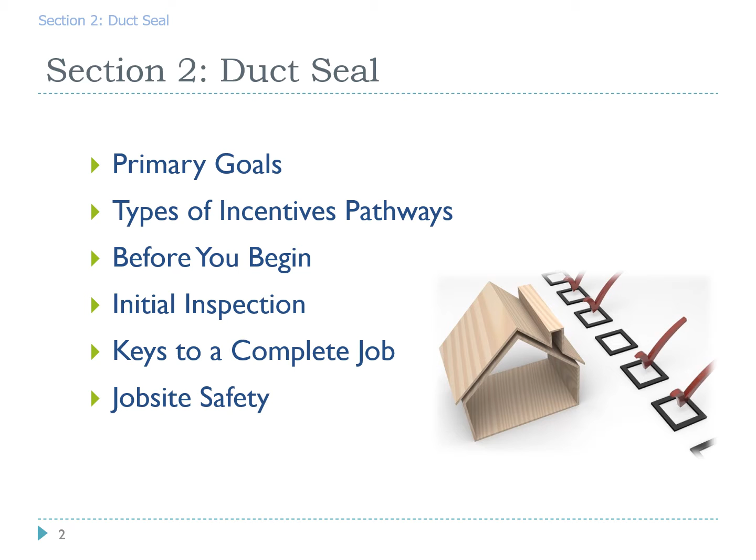The agenda for this section covers primary goals, types of incentive pathways, what to know before you begin, initial inspection, keys to a complete job, and job site safety.

If we have ducts completely inside the conditioned space, most of the air does get into the home. With duct sealing, if we can make an improvement close to 20%, that's better than an increase from an 80% furnace up to a condensing gas furnace, or for most cases with a heat pump, any improvement in HSPF.

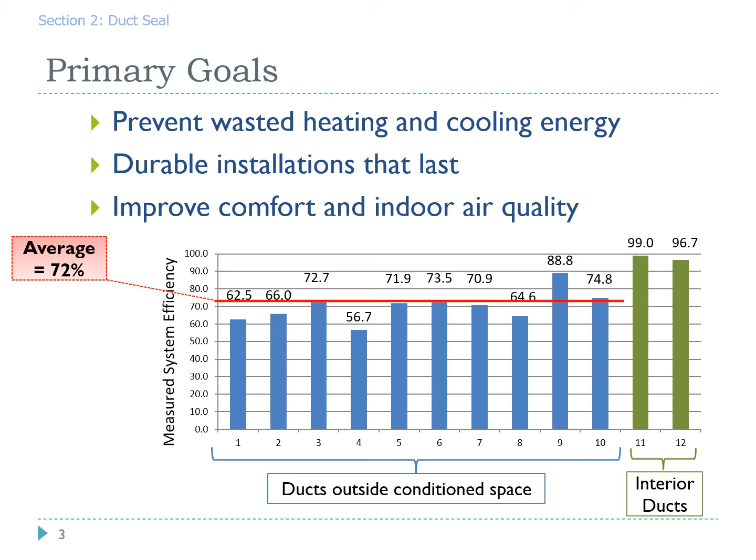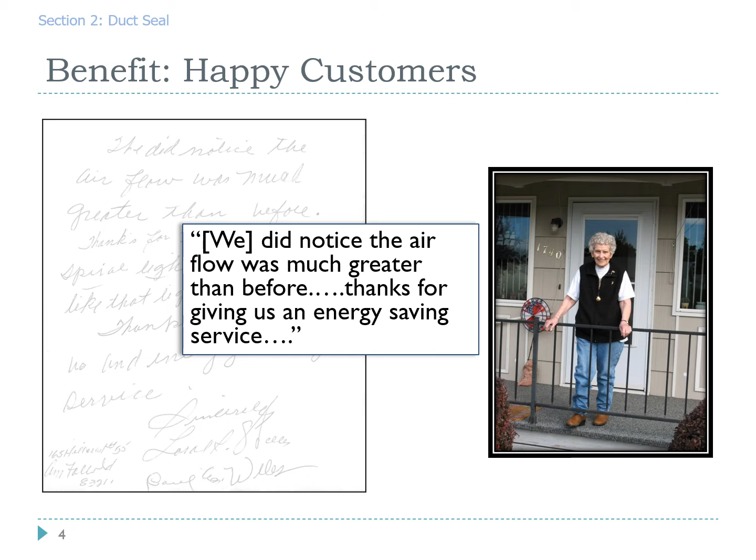One of the major benefits is happy customers. In this example, the homeowner wrote to the utility and the contractor to let them know what a fantastic job they did, and that she noticed greater airflow out of her registers and energy savings on her utility bill. We all strive for happy customers.

There are two types of duct sealing incentive pathways: PTCS duct sealing, which requires pre and post duct leakage testing, and prescriptive duct sealing, which does not require duct leakage testing. Check which pathway your utility offers—some may offer only one of these two, and some may offer both.

For prescriptive, other than not requiring the pre and post duct leakage testing, all the other specifications remain the same. You'll need to check with your technician's certification type to ensure they can meet either the PTCS duct sealing or prescriptive duct sealing requirements.

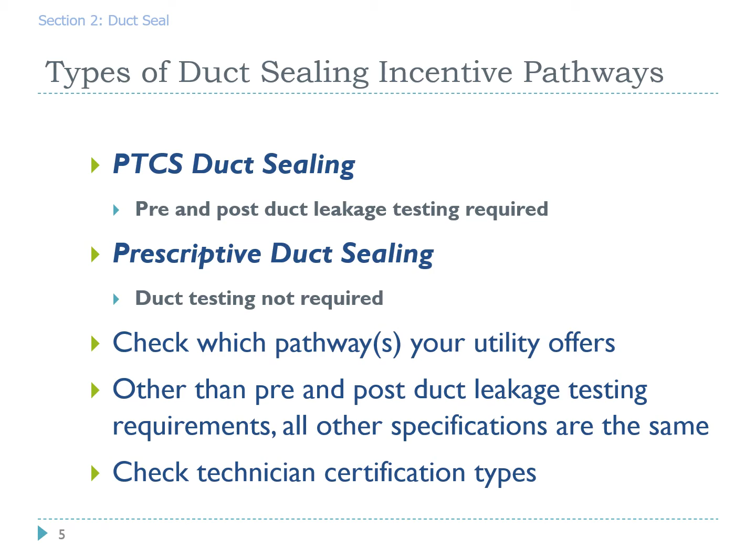So what's involved for PTCS duct sealing? Measuring the duct leakage with fans. We do a leakage to exterior test, which technicians have been trained for in the class. Then we seal all the opportunities, and then measure the leakage again to find out the difference. Remember, prescriptive duct sealing does not have this leakage measurement requirement.

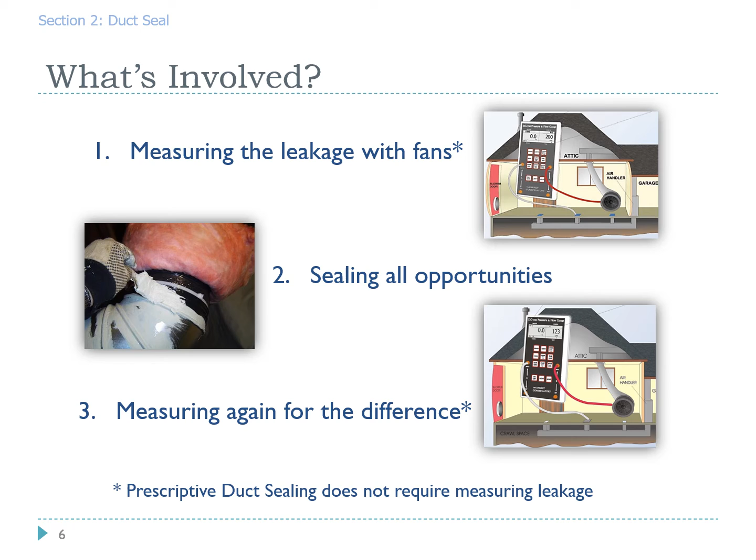Another specification is that at least 30% of the ducts must be located in an unconditioned space and be accessible. Note that ducts in basements are considered to be in the conditioned space.

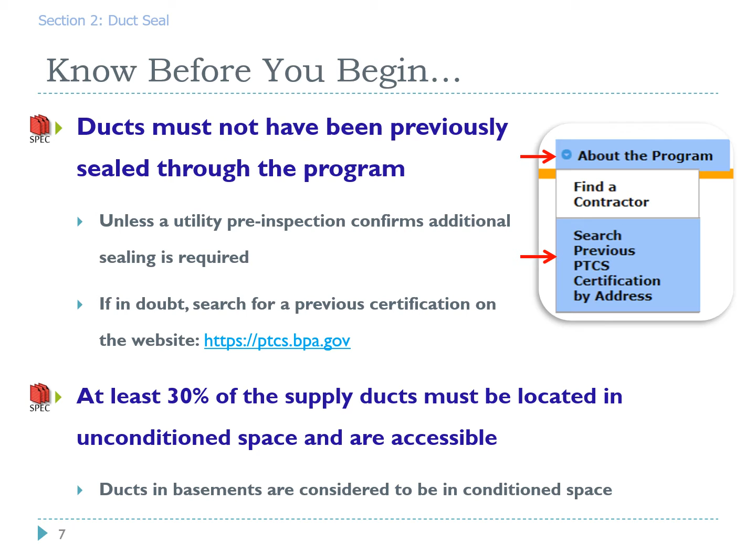Outside versus inside: this graphic represents a home, and you can see that the attic is definitely outside the conditioned space, as is the crawl space, and even a garage where the air handler is located in this graphic would be outside. Inside the home, obviously, is inside conditioned space.

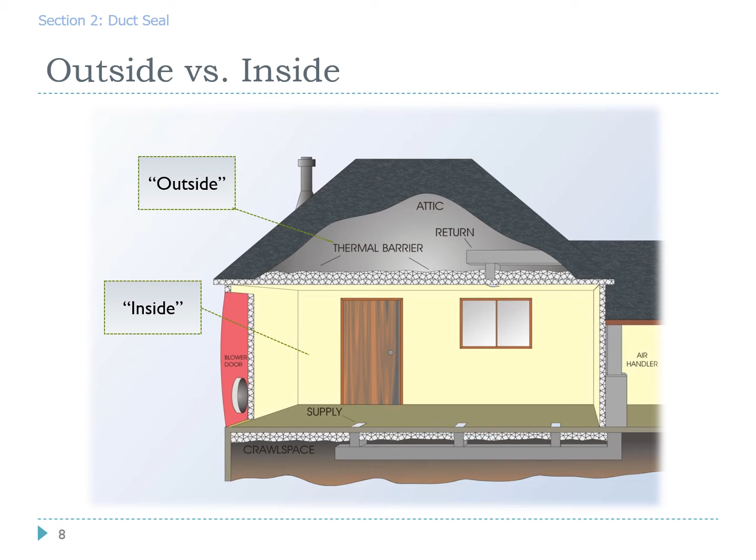The leakage requirements for single-family homes fall into two categories. Pre-sealing leakage is based on the home's square footage. If the home is larger than 1,667 square feet, we have to have a leakage before starting any work of at least 250 CFM. If the home is less than 1,667 square feet, we have to have a leakage equal to or greater than 15% of the home square footage.

For example, a 1,000 square foot home falls into the category of less than 1,667 square feet, and the leakage would have to be 15% of that square footage. So for a 1,000 square foot home, we'd have to have a leakage of at least 150 or more in order to be able to start doing work.

For post-sealing leakage, we have to meet one of two requirements: the CFM leakage after sealing has to be a 50% reduction, or the CFM has to be equal to or less than 10% of the square footage of the home.

Using that same example of the 1,000 square foot home, if we tested in at 150 CFM of leakage, we would need to get that down to at least 75 CFM to achieve the 50% reduction, or down to 100 or below to meet the 10% of the square footage of the home. And remember, prescriptive duct sealing does not have these pre and post leakage requirements.

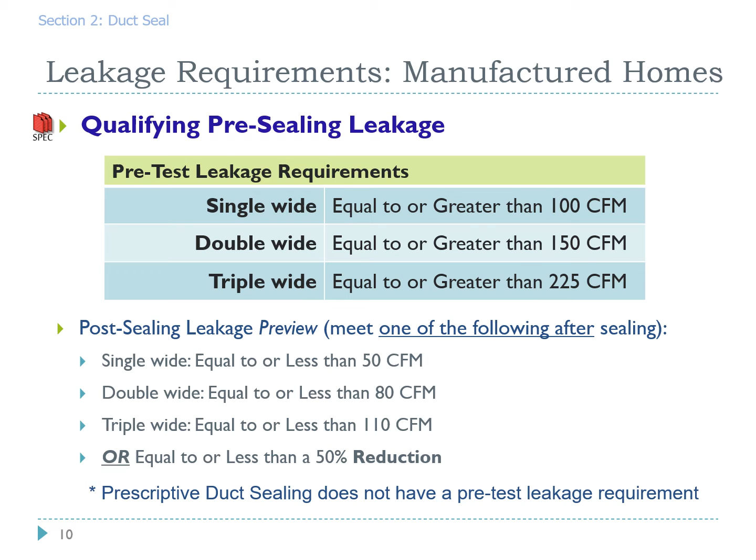For the initial inspection, you want to find the major problems. You want to check for building cavity returns - they're pretty prevalent in older homes. Decide whether duct sealing is enough, and then also decide whether parts or all of the duct system needs replaced.

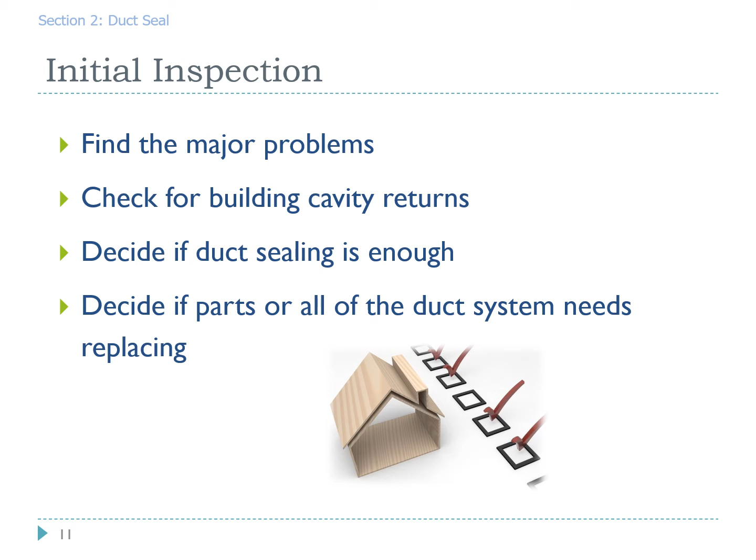Occupants of the home have a lot of information about the homes they live in. Here are some sample questions that might help you. Do you have rooms that are hot or cold? It may help find duct disconnects or proof of poor duct design.

Do you pay high energy bills? It gives them an opportunity to express that frustration if they do pay high bills. And if you're familiar with typical energy use in your area, looking at those bills can give you a wealth of information.

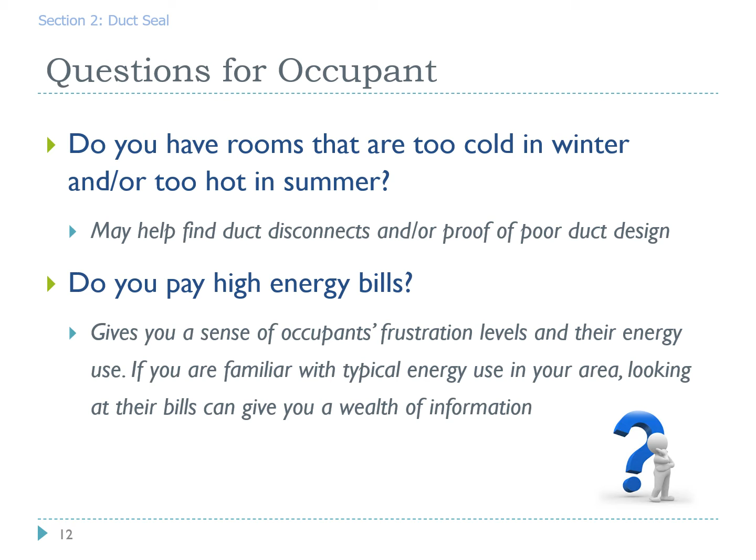Continuing with questions for the occupant: Do you notice any unusual smells when the furnace air handler turns on? Garage odors, crawl space odors - this can give you some solid clues of disconnected ducts.

Do you notice any insulation on your furnace filter when you change it? Insulation on the furnace filter is another good indicator of serious duct problems in the attic. I had some insulation in my register recently, and when I investigated, I found that a mouse had chewed through the supply flexible duct, and the insulation ended up in my register.

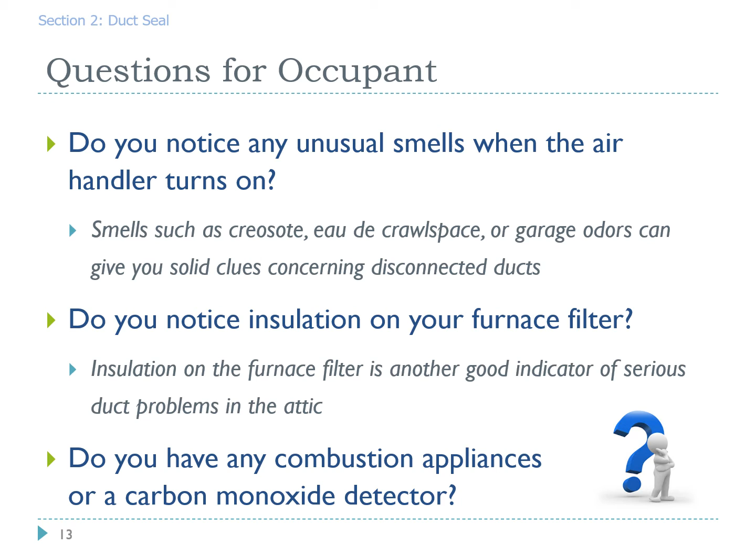Do you have any combustion appliances or a carbon monoxide detector? We'll cover why you'd want to ask that here in a little bit.

Conducting a visual inspection: look for the real obvious tests inside a home, like does air come out of the register? If not, a damper might be shut, or it might be due to a disconnect. When you remove a register or grill, do you see ductwork, or do you see the attic or a crawl space? These are great ways to identify where the areas that need to be addressed are.

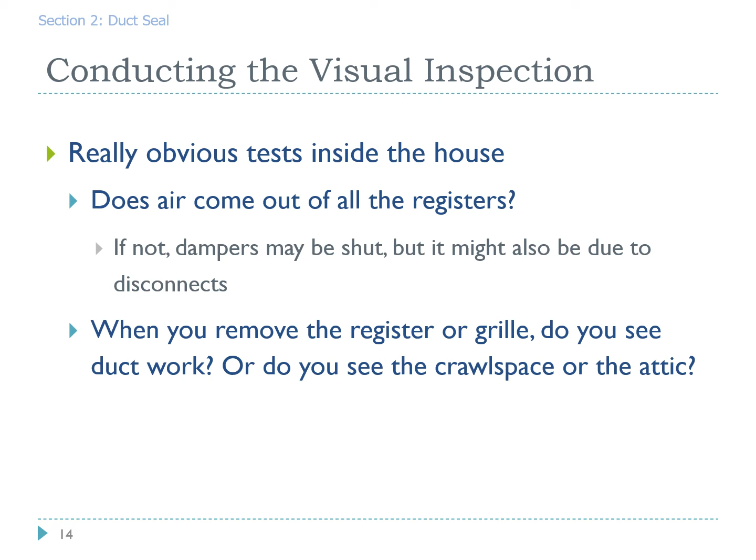Here are some images from a visual inspection. Upper left, we have a never-connect - duct was there, boot's there, but no hole through the floor to deliver that air into the home. In the middle on top, it looks like some type of dryer vent style ducting.

There's some tape, and it looks like a lot of leaks there. Upper right, we have a takeoff that was tabbed into a plenum or some type of supply duct, and it looks pretty severely leaking.

Also on the bottom left, we have gores of an elbow - those leak pretty bad. Bottom right, we have a flexible duct that has been pulled off, disconnected. These are great ways to identify areas that need addressing in duct sealing.

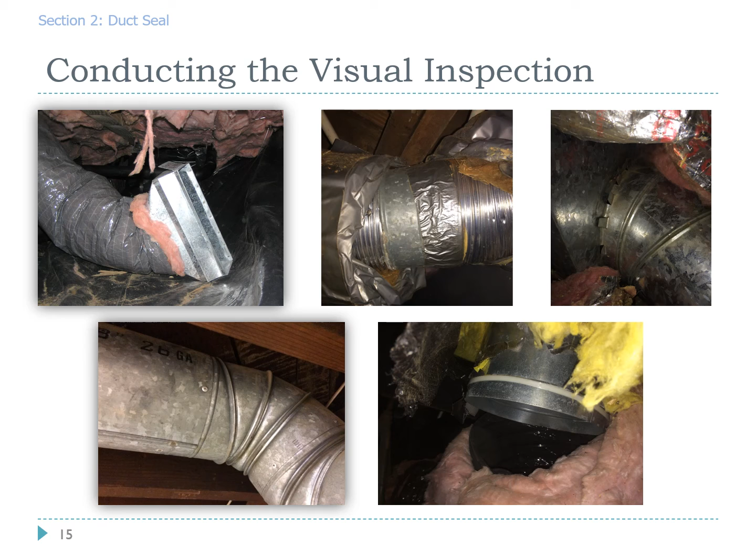Also, insulation is not a barrier to accessibility. This includes attic insulation. So with attic insulation, you need to move the insulation out of the way, seal the ducts, then put the attic insulation back to as good as when you moved it out of the way. Also, when insulation is removed from ducts, it shall be reinstalled and securely attached with mechanical fasteners.

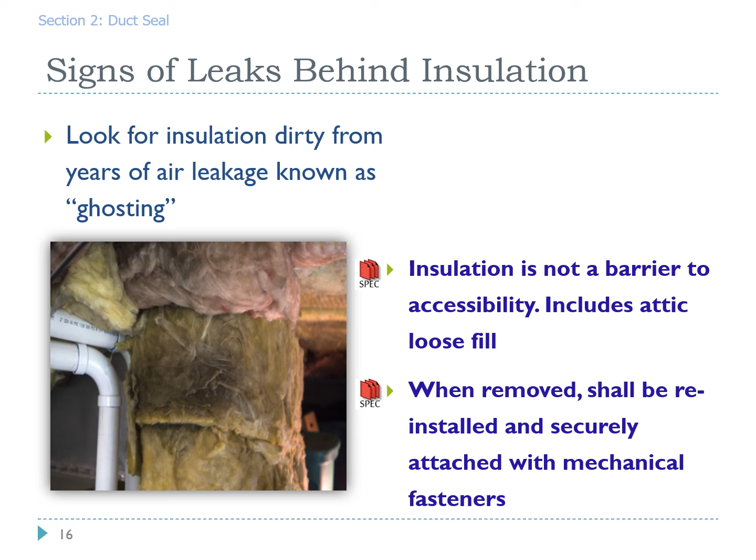Duct sealing really leaky duct systems can be quite problematic. If you have a catastrophically leaky return, like pan floor joists or cavity returns, there's a specification that allows for a supply side only test to be used to determine that duct leakage.

Trying to seal up a cavity return or a pan floor joist might not result in much CFM reduction. So we have this stipulation where, if this is the case, you can separate the supply off, typically at the filter location at the furnace, and test only the supply side to get your leakage numbers. Make sure you indicate that on your documentation.

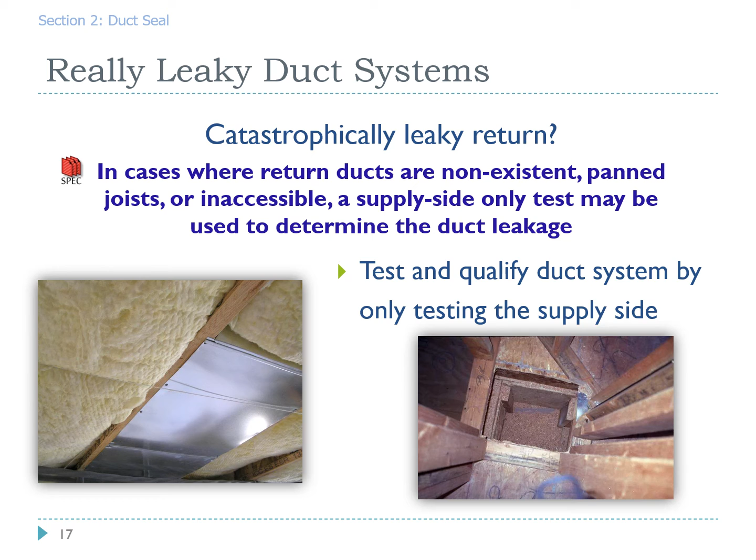What problems are you trying to fix? Comfort issues usually require re-engineering, so don't overpromise results. If a room needs 300 CFM, the ducts need to be large enough, and duct sealing might not be enough to take care of that issue.

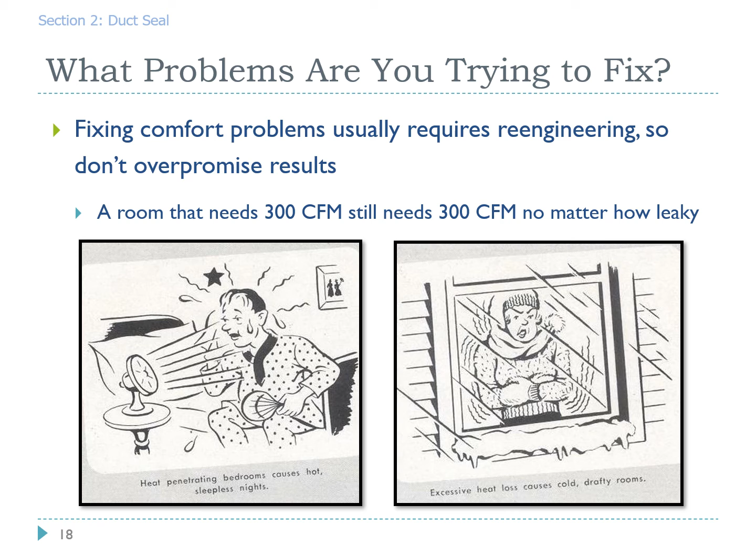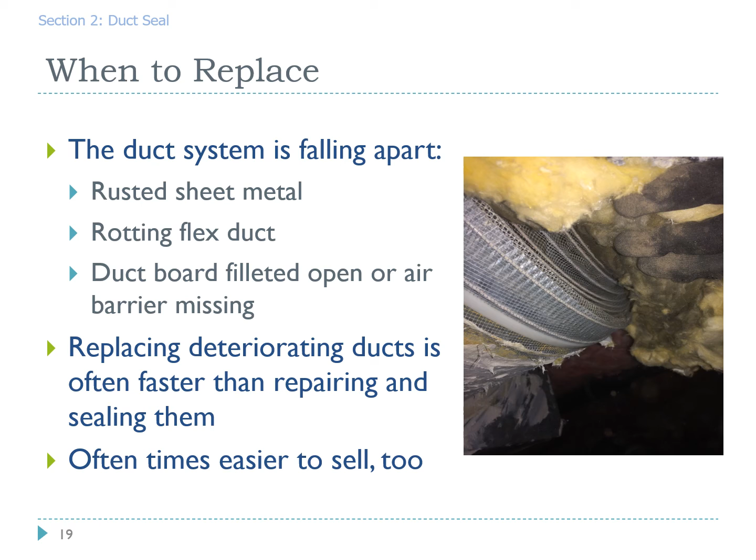When to replace duct components: if the duct system's falling apart - you have rusted sheet metal, rotting flex duct, or duct board that's missing some of the air barrier - it's often easier to replace those duct components than trying to repair and seal them. And oftentimes it's easier to sell too.

Keys to a complete duct seal job: remove the old tape, mechanically fasten, and make sure necessary repairs are made. Put tension ties on the inner liners and outer liners of flex duct.

Put screws in the metal duct connections. Support the ducts and fasten boots to the subfloor. Seal the ducts with UL 181 listed mastic. Plug, don't paint. The specification says mastic should be as thick as a nickel.

That's from the manufacturers. In order to be able to seal properly, the mastic should be that thick. Tape is only allowed on the air handler to plenum connection or an access panel.

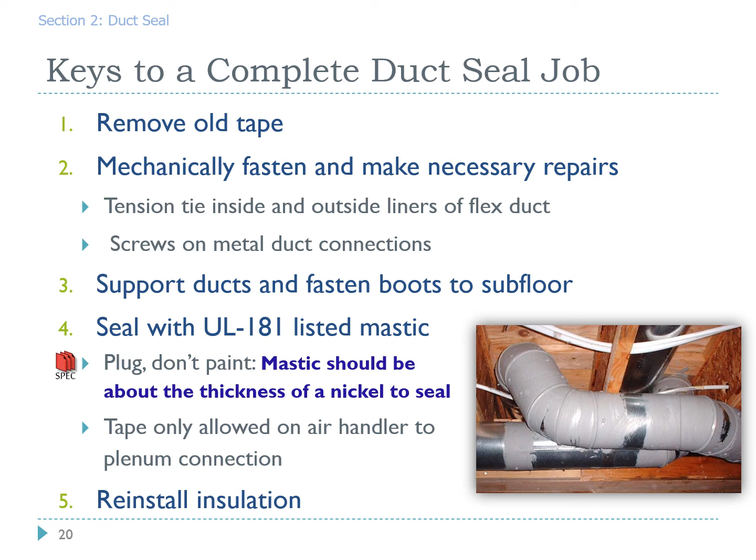And with insulation, once the ducts are sealed, it needs to be reinstalled. Fasten, support, and seal them. The specification says all accessible portions shall be repaired, mechanically fastened, supported, exposed from the insulation, sealed with the approved materials, and then re-insulated.

Below we have some areas that definitely need addressed: air handler to plenum connections, joints between the metal ducts, supply and return plenum joints, seams, caps, and corners, gores on the elbows, inner and outer tension ties on flexible duct connections, takeoffs, seams on boots, Ys, Ts, and splices, and for manufactured homes, the crossover, and also end caps.

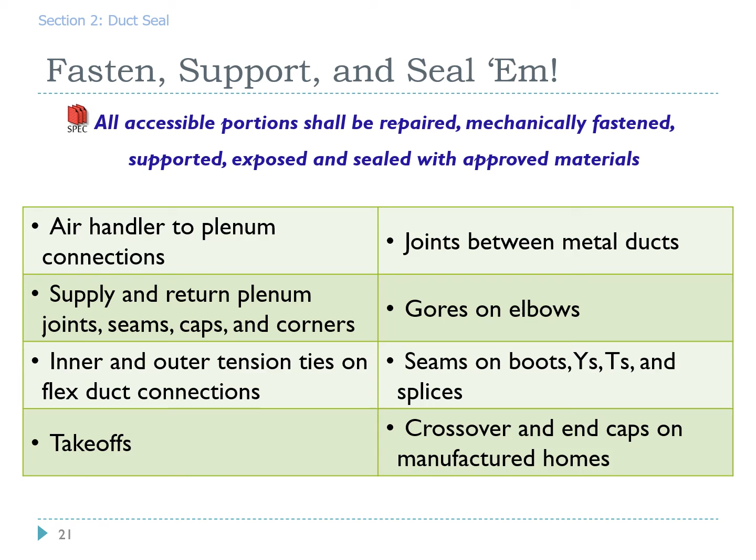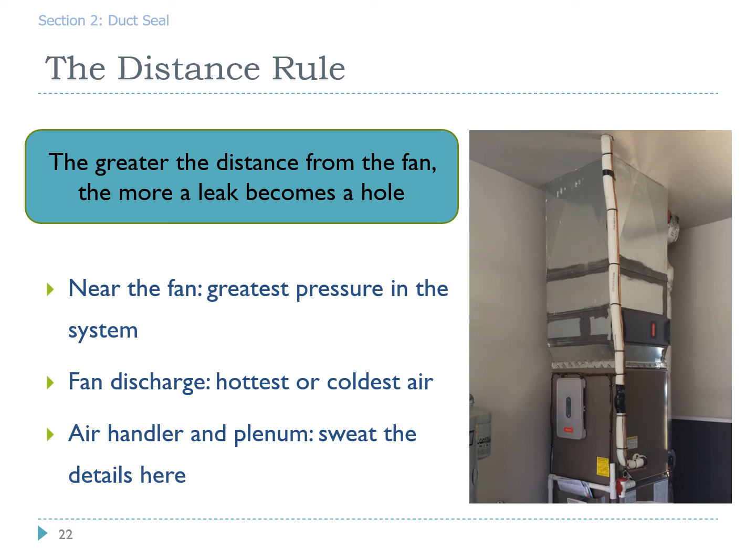The distance rule: the greater the distance from the fan, the more a leak becomes a hole. At the furnace is where the greatest pressures in the system are, also the hottest and coldest air. Right at the furnace, the air handler is where we really need to sweat the details to make sure air stays inside that duct system and gets delivered into the home.

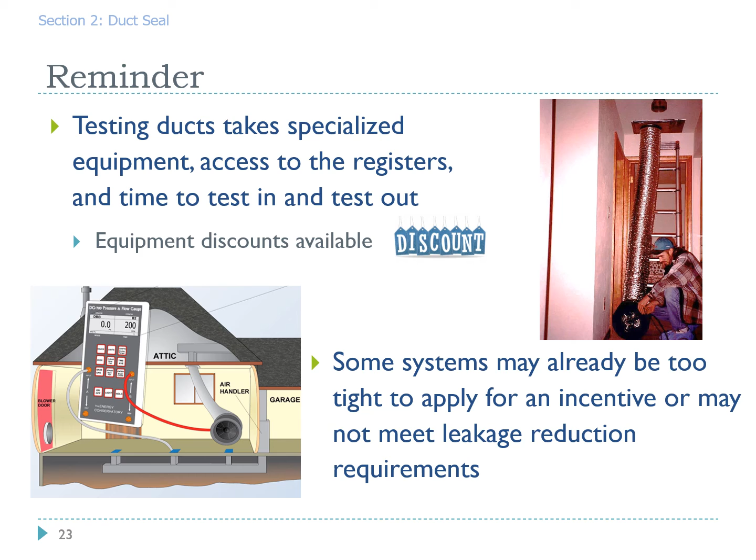A reminder, testing ducts takes specialized equipment, access to registers, and time to test in and test out. There are equipment discounts available, and that'll be discussed in the next section. Also a reminder, some systems might already be too tight to apply for an incentive, so those pre-leakage requirements are important to remember. Trying to get a duct system tight might be an issue, and the incentives might not be available. It might be important for comfort, but no incentive will be available because there's just not enough energy savings available for the utilities to pay an incentive on that.

If anybody's using the AeroSeal equipment, AeroSeal is approved for use with PTCS with a few exceptions. You have to add a note into the registry entry. Both supply and return sides of the system must be sealed.

All the other specifications are still required, including duct repair, tape removal, supporting the duct systems, mechanically fastening them, and testing. You still have to do a test in and a test out leakage to the outside. Still required use of the blower door.

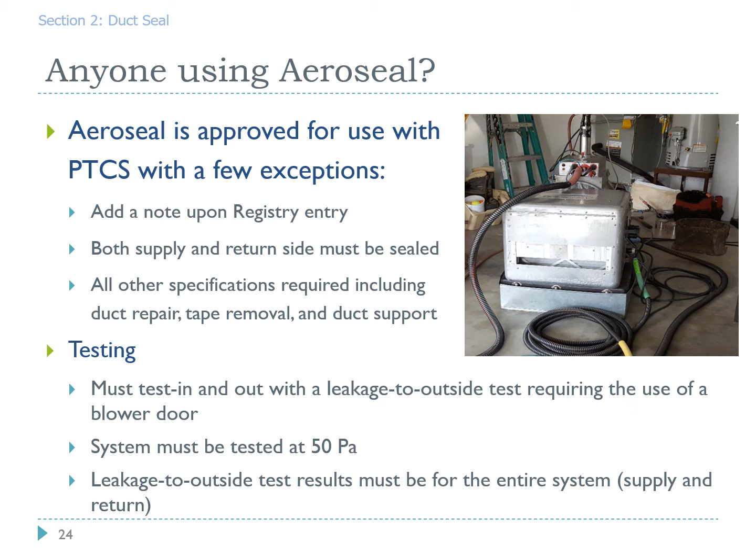The system must be tested at 50 pascals. I know the equipment is typically set up to test at 25. Leakage to outside test results must be for the entire system, supply side and the return side.

Combustion equipment: whenever we have combustion equipment, we need a CO alarm. It's required. If there's anything that burns any fuel in a home or attached structure, like a garage, the program requires that a carbon monoxide alarm be installed. No matter what fuel it uses, gas, propane, fuel oil, wood, pellets, etc., just something that burns, we need to have that carbon monoxide alarm in the home.

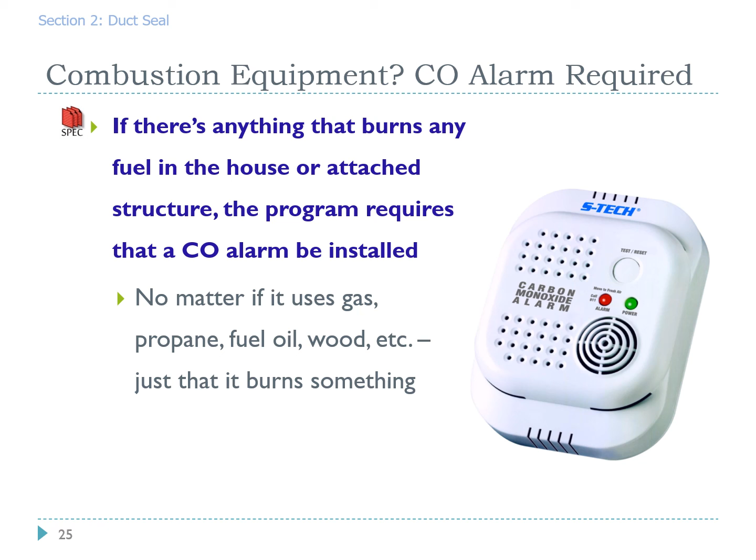Potential negative effects of duct sealing: you get a lower dilution rate. And so what that does is carbon monoxide might build up in a home and not be able to be diluted through the natural air infiltration that happens in a home.